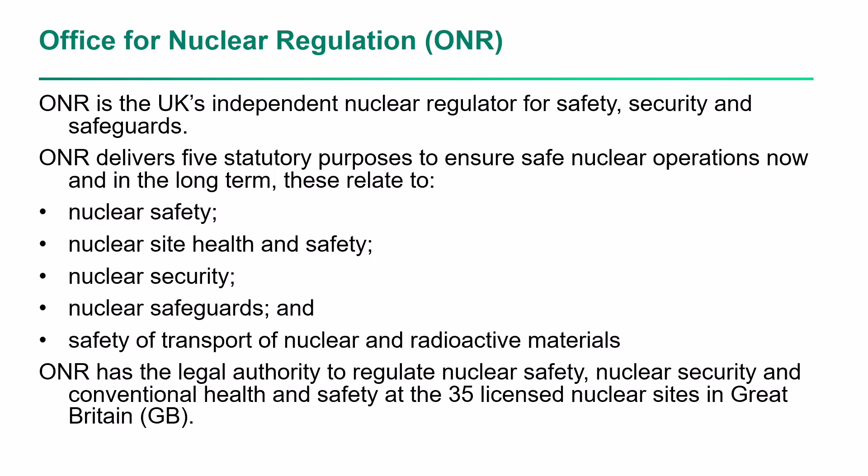Now, this you may not be as aware of: with the introduction of the Energy Act, we are empowered to conduct research. Clause 88 of chapter 3 says this, quite interesting: the ONR may carry out research in connection with the ONR's purposes, or arrange for such research to be carried out on its behalf. When appropriate to do so, the ONR will publish those results or arrange for them to be published. We implement our research via our research strategy, which is available on our website. The work typically gets let via the technical support framework which we have in place. So that's a bit of useful background.

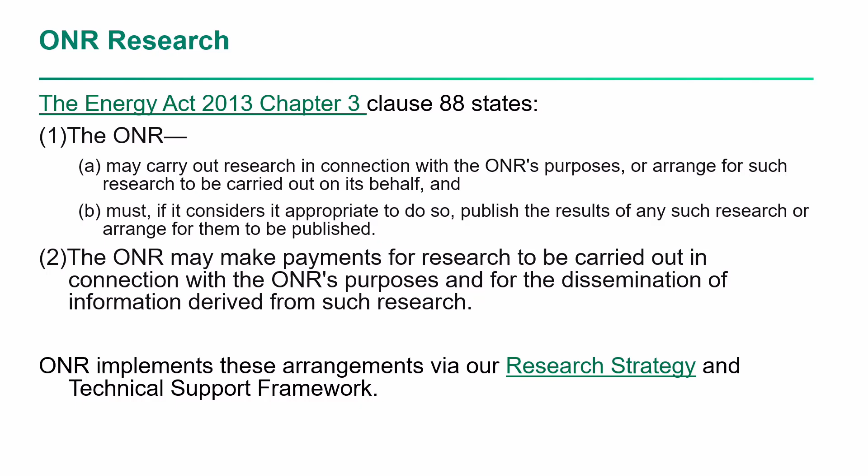I think one of the questions that follows is then: what would drive the regulator to actually commission a piece of research? There are three areas or drivers, laid out here. ONR requires independent advice to assist with our decision making - that could be one. ONR has identified a knowledge gap which requires research, and/or the specialists within ONR require greater understanding and oversight of developing innovations or emerging subjects. It was felt that this research being presented today for aircraft impact touched upon all three of those drivers.

So expanding upon that a bit more, the why, or the rationale behind why, it's important just to go over the current position. So we have our safety assessment principles, and they identify aircraft impact as an external hazard. We've got expectations within the technical assessment guidance, which is TAG 13 in Annex 4 for aircraft impact. And duty holders are expected to consider both accidental and malicious aircraft impact within safety cases.

Now the diagram on the right there attempts to illustrate a typical framework by which a duty holder may consider accidental aircraft impact. And you can see it follows those steps of identifying the hazard, determining a predicted frequency, applying a screening criteria, then ultimately at that point the hazard will be either screened in and a design basis established or screened out.

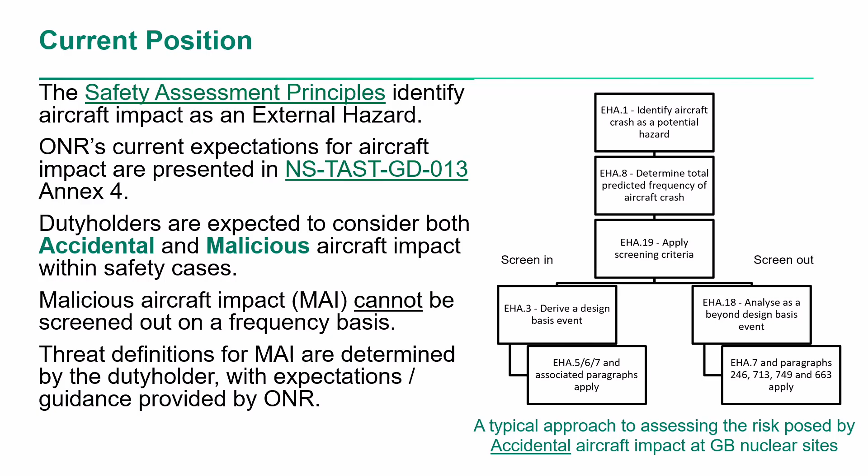But importantly, malicious aircraft impact is different, because with malicious aircraft impact we assume it can occur. Okay. So therefore threat definitions do need to be established by the duty holder, and we work in close collaboration with that. We have expectations as a regulator which we pass on to help get to that position. Okay, so that's where we have been, where we are.

Some other peripheral factors which are significant to why this research was necessary are laid out in the next two slides. Malicious aircraft impact often dictates the design of civil structures for new nuclear facilities. I think we can all agree that it certainly does that, particularly reactor shells and other safety critical buildings or facilities. So it follows, overly conservative threat definitions could result in significant cost consequences due to increased construction costs for new builds or existing facilities, lots of extensive safety reviews. Conversely, underestimation of the threat definition could have safety implications also.

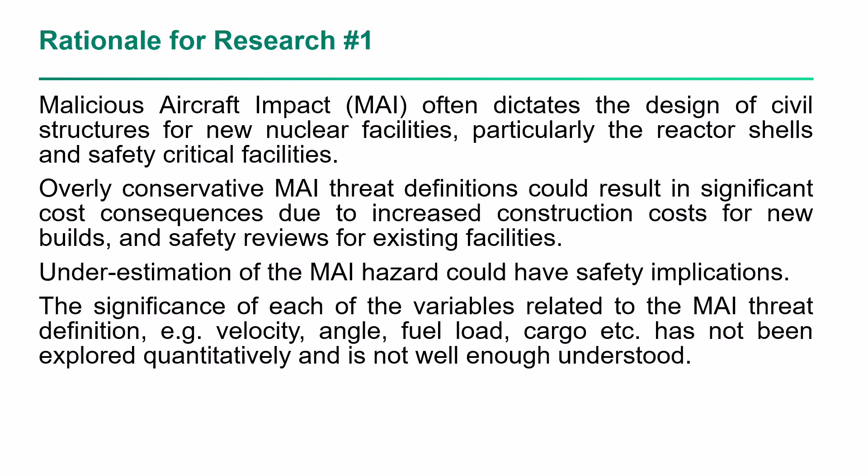Now, the significance of each of the variables related to that threat definition, and there are many, Ming's going to be touching on these, some examples given here: velocity, angle, fuel load, cargo, etc., has not been explored quantitatively, especially combinations of these different parameters. And that was something which on review was becoming clear. So ultimately what mattered was not well enough understood. Unlike seismic, there was little guidance and references on this topic. Compounding the issue, analyses are typically complex, time-consuming and costly.

And perhaps to conclude, one of the significant things was ONR's regulatory expectations for malicious aircraft impact were last developed post 9/11 and have not seen any significant attention since then. And there's been a significant amount of work and development in the area which led to really it being highlighted as a research need.

So what will the research do? Well, the output is going to be used to inform a revalidation of the regulatory position. So this is the expectations that will get communicated to duty holders. So it's going to inform and provide the evidential basis for us to be able to do that. Okay, so that was the rationale for why.

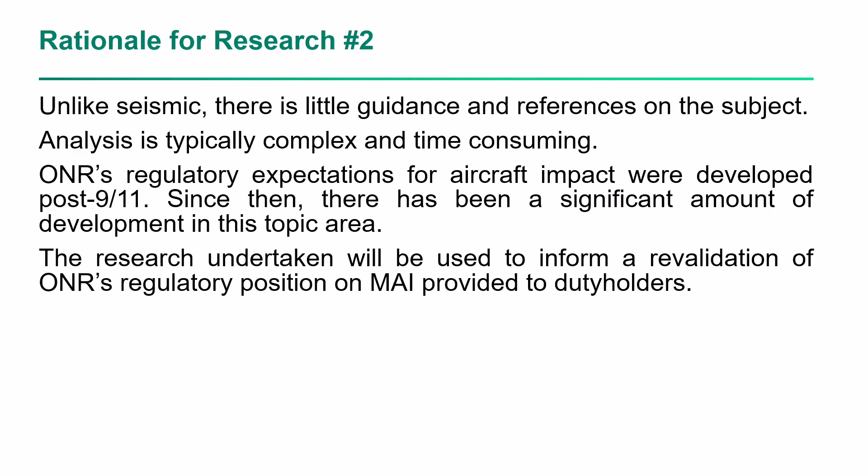So how do we go about commissioning and splitting it up into some logical sequence of activities? Well, we commissioned the research via Mott MacDonald. Now, an important point to note here is that for us as a regulator, what we really wanted to achieve here was not just the view of one particular consultant or one particular branch of individuals. What we really wanted to do was establish what a consensus position was. So although Mott have been leading this work, to add that robustness to the output we had a peer review team established, and Ming will outline the composition of that, but essentially we had representation from Arup and also from specialists from outside of the UK.

The research was split into two phases. Phase one was to provide ONR with an improved understanding of the sensitivity of aircraft impact load time functions to credible variations of the hazard definition and the significance of aircraft impact parameters to the definition of the hazard. It's kind of an exploration stage.

And then phase two was to provide ONR with updated recommendations for representative threats that are relevant to the UK context using statistical analysis and other components as well, bringing that all together. And then the last but very important aspect was to identify the potential consequences for typical nuclear plant and nuclear facility protective structures under these postulated aircraft impact threats.

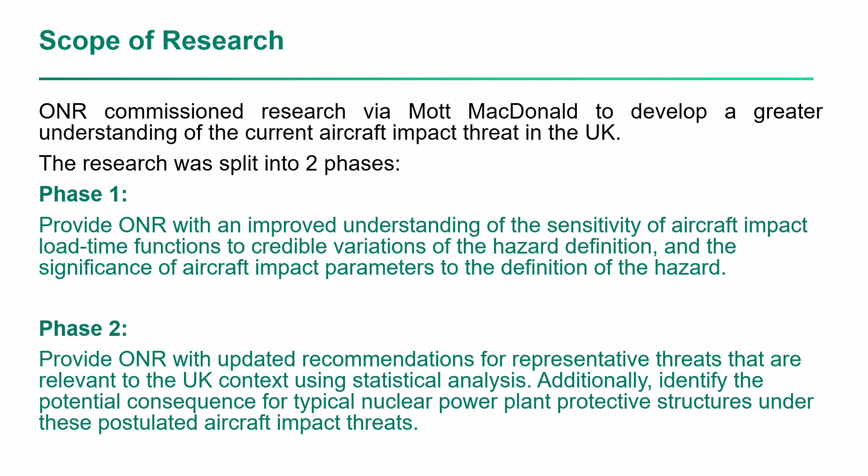Thank you, Richard. Before I proceed with the next 40 minutes of my presentation, I just want to highlight that what I'm presenting today is not my work alone. It's actually a very large team of people that's undertaking this work. There's about 3 years' worth of work done over two phases, as Richard was saying. I'm the project director and framework director for this, providing the directions and the tools and support they need. But the real brains of the piece of work actually come from the team.

We have engineers, we have structural analysts, we have aviation specialists, and also safety case people. So the credit should go to them. I'm merely the conveyor of the information here, providing a summary of the work. And from the project team perspective, we want to say thank you to ONR, because the team have had really good fun in the last 3 years doing some really exciting and interesting research work.

Before I go into the details of the research, I think it's good to provide a summary of the current status quo of aircraft impact assessment, what we're doing these days, and how we got to where we are today. For people who don't know, this is a brief historical context. We started aircraft impact analysis as a load case in nuclear power plants in 1968. Three Mile Island, you've probably heard of that. The main reason was because the power station is located very near the airport.

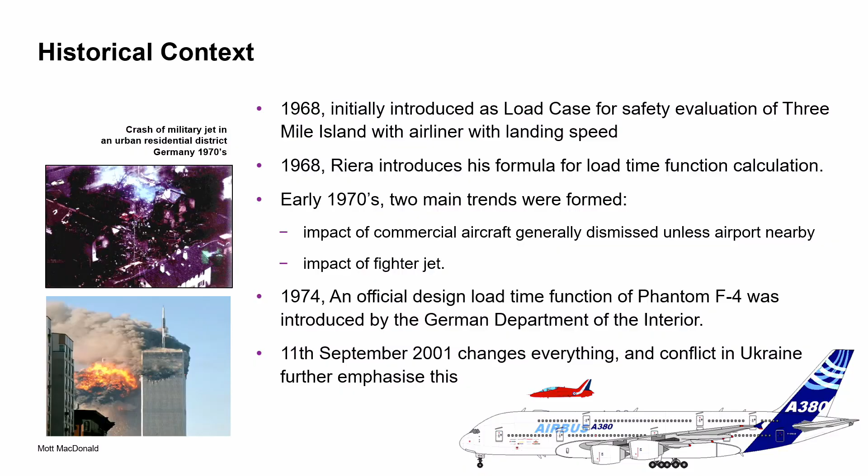Of course, I'm sure we all know September 11 changed everything. We now know the commercial aircraft threat is real and the consequence is very, very significant. And with the conflict in Ukraine and other wars, this has become a real and present issue. However, it's worth highlighting that on September 11 we had the World Trade Center and the Pentagon, but if you put those next to a nuclear power station, especially the containment building and the spent fuel pool, the nuclear facilities are actually very, very small, even though they look like huge buildings.

But by no means is aircraft impact onto those facilities impossible. In fact, before COVID, there was a detailed study done in Switzerland, in which retired pilots were hired in aircraft flight simulators, to work out that it is very possible for this to happen.

And to add to that, you probably realize that there's actually a lot of aircraft in the sky. Of course, it's not to scale, but there's still a lot of them. And there's actually two important things to highlight in here. You've probably seen there's a little hole in Paris. You wonder why. Because this is actually taken on the 26th of July this year. That's the opening ceremony of the Paris Olympics, where you have the no-fly zones. The other big gap as well on the right-hand side is Ukraine and Belarus. I don't need to explain why there's not many flights in there.

So we know it's real. There's lots of flights around. What are the guides? As Richard pointed out earlier, there's not many. These are what I listed here. Those are the majority of the guidance already available, and that's pretty much it. The three most useful ones are the IAEA Safety Reports 86, 87, 88, and they're quite new as well, and there are lots of details in them.

The problem though is, even in all these documents, even within IAEA, the information sometimes is contradictory. So they're telling you different things. What do you do? And the other, probably most important, most used guidance is NEI 07-13, which sets out the performance requirements and is used heavily in the US.

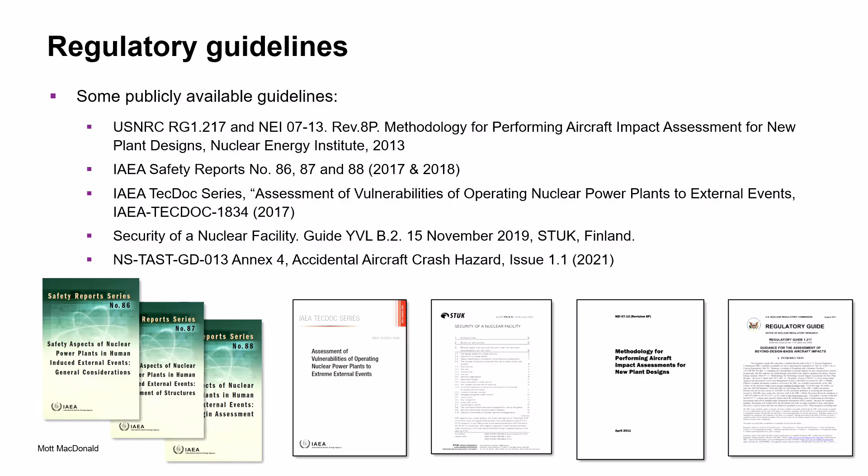And I also want to provide a very high-level summary of a typical workflow, what we do in aircraft impact assessment. You start from the very top left: you define the threats, the hazards, like what Richard was saying. That is the job of the regulator. And then you identify the performance level. This could be based on your safety assessment principles, your radiological release limits, and things like that. Again, that is the job of the regulator to say, this is what we expect you to see.

Some regulators will also tell you what the load time function, the load derivation is. In the UK, we don't. And some regulators even tell you what acceptance criteria you should be working towards. This could be your containment remaining intact, your core cooling remaining, and all this. Others, you have to rely on the duty holder to define what the acceptance criteria are.

Once you have these acceptance criteria, you then move on to determine your protection strategy. What you're trying to do here is define which buildings you need to protect and why. This could be because of your number of safety trains. For example, you could have multiple control rooms, multiple backup diesel generators, so only one will be taken out at a time. So protection, screening, shadowing, and all these different techniques. And then you down-select to 1, 2, maybe up to 3 buildings that must be protected from an aircraft impact perspective. This will always be the reactor building, but it could also be a building that contains your spent fuel pool or your control room.

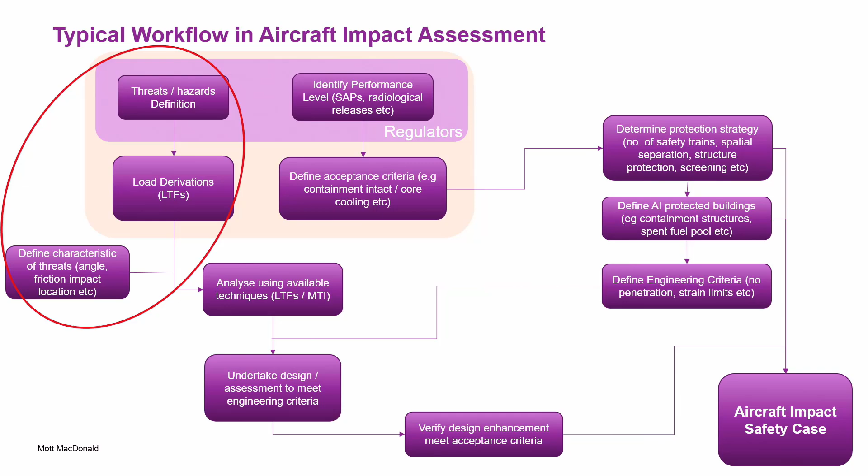But before I go into that, I want to briefly use 2 or 3 slides to explain the various techniques for the load time function approach and the missile target interaction approach. As I said, there are 2 main approaches: load time function and missile target interaction.

Load time function approach itself has 2 ways. You have your classic Riera function, which essentially converts the whole aircraft into a multiple degree of freedom system with crushing zones and things - a very clever and computationally efficient approach.

Or you can do a more detailed finite element load time function approach. Essentially, you build an aircraft model, crush it onto a rigid wall, and take the reactions. You should come up with a very similar answer to the Riera function if you do everything correctly.

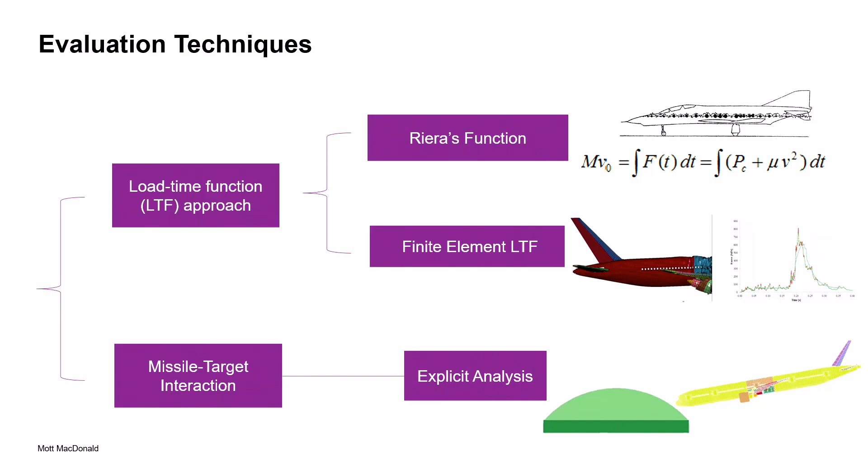And then, of course, you also have the missile target interaction, which usually is explicit, and that would require modeling of the target itself - the size and rigidity of the target will affect the results. Essentially, one is a coupled approach, one is a decoupled approach.

I'm not going to go through the details on the benefits of the Riera function and finite element analysis, but in a broad manner, the Riera function is quick, simple, very good for combat aircraft, but not so good for commercial aircraft.

Especially when you have oblique impact, complex geometry, or a target much smaller than your aircraft - if you just use the Riera function, you're applying the whole aircraft onto that single point. Whereas if your target is so small, you can't have the whole aircraft hitting it.

The finite element analysis approach resolves those issues, but the disadvantage is you need to build the aircraft model, requiring verification, validation, and a lot of work beforehand. Of course, once you build the model, you can use it again and again.

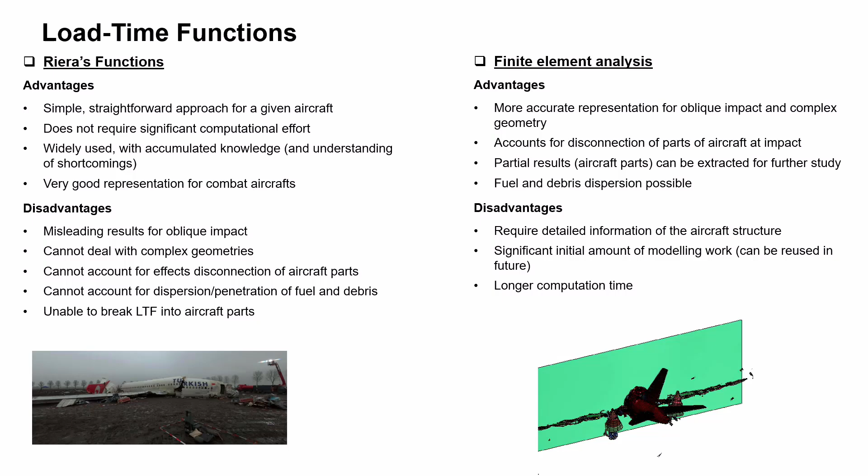And then in the aircraft impact analysis technique, again I'm not going to go into detail, but there are 2 major parts: missile target interaction and load time function analysis.

If I start with the load time function analysis, that is basically the mainstream approach right now. You build your aircraft model or use a Riera function, generate a load time function, and apply it to the structure as a pattern onto the structure.

It's easier and better computationally, but complex geometry will be a problem, or you can't account for the disconnection or erosion of the aircraft, and fuel and debris, for example, is going to be difficult to capture.

For missile target interaction, you have the benefit of capturing all those, but a significant disadvantage is the modeling effort, and it usually takes a long time to run. It's okay to stick with the load time function decoupled approach if you have a very large, rigid structure, but that's not always the case.

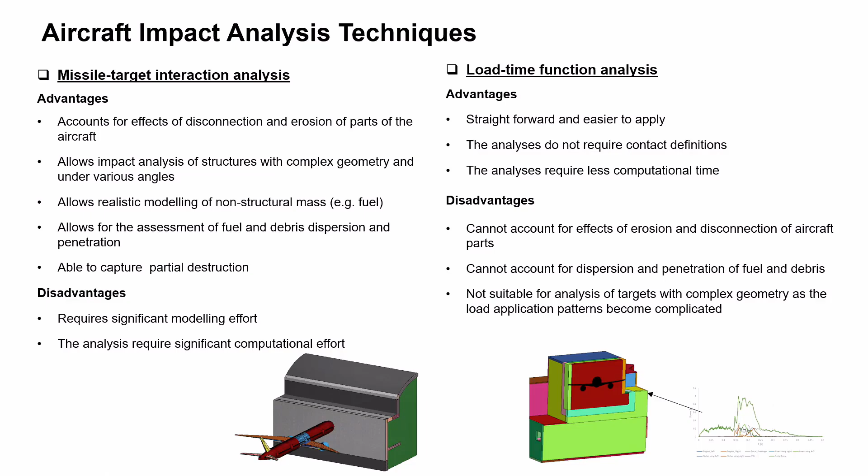There will be cases where your target itself is small and is moving. This is an example - essentially a spent fuel cask put on the ground, with spent fuel inside. If your target itself is moving, you have no other choice but to use missile target interaction, because how else could you do it? So this becomes the only reasonable option.

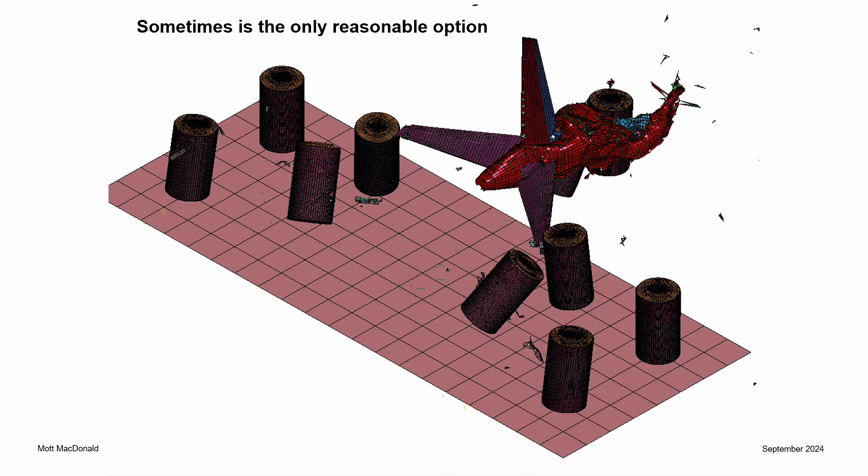So that is a very, very brief summary of the various different techniques you can use. Now going into the detail of the research work that we are doing.

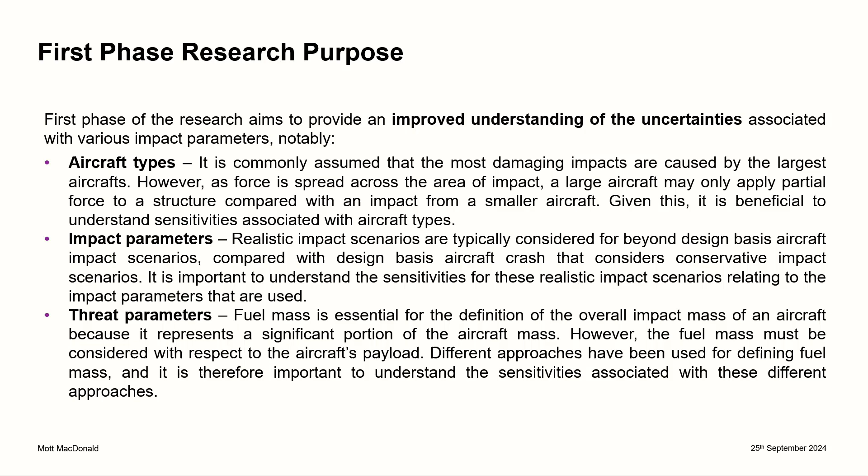And the other thing is the impact parameters - in this case your impact velocity, impact angles, and things like that. And then your threat parameters, which relate to the threat itself, such as payloads. I'll go through them in detail later, but the overall approach is actually quite simple.

Essentially what we do, we define what aircraft we need to look at. We define the parameters we need to bring forward for sensitivity analysis. We then set out a baseline and construct the aircraft model. You undertake a series of finite element analysis, crushing them into a rigid wall.

You generate a series of load time functions and compare them. So the approach is very well known in terms of sensitivity study, it's just a lot of them. And then 6 aircraft were selected, and I'll go through one by one the reasons behind it.

The first one is the Boeing 737. In this case, Boeing 737 together with A320, they are probably the most used aircraft in the UK for sure, and probably in the world. And your B767, which is unfortunately the aircraft used in the September 11 event, and the Boeing 777, which is the largest twin-engine long-range aircraft.

And then you have Airbus A380, which is of course the largest commercially available aircraft, in this case with 4 engines. And you have the Gulfstream G650, which is a very large business jet, in this case quite small.

You're thinking, why? The reason for a business jet is it sits between a combat aircraft and a passenger aircraft, yet a business jet usually flies at much higher velocity. And then, of course, you have the cargo version, a freight version, in this case we use a B767, but that could be anything.

I mentioned earlier in the guidance, even various guidance provide you a different categorization of aircraft. So even within IAEA documents, in this case SR 87 and TECDOC 1834, they have a slightly different grouping system.

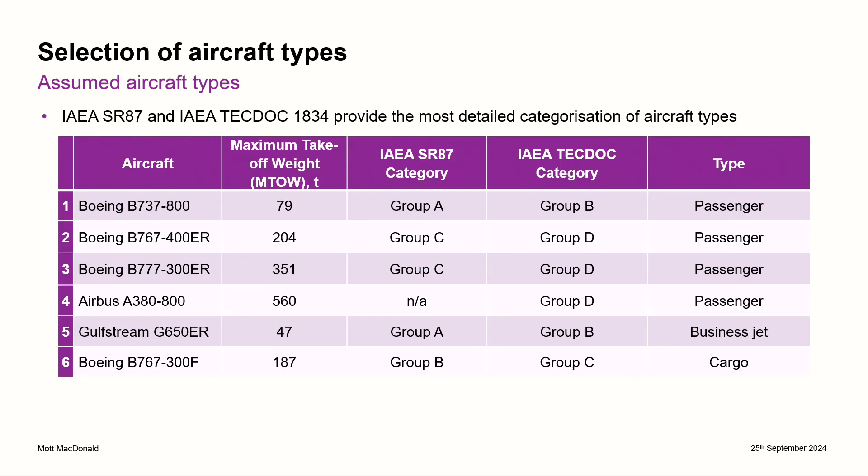We also only model what is needed to be modeled. So in this case, if you look at the picture in the top left corner, the wings are a lot smaller than you'd expect to see, because the non-stiff, flexible part we don't model, since there's no impact to it. The nose we don't model because it would just crumble. And on the top right picture, all the seats and things we just smear over the cross-section of the aircraft because it's not important for what we're trying to do.

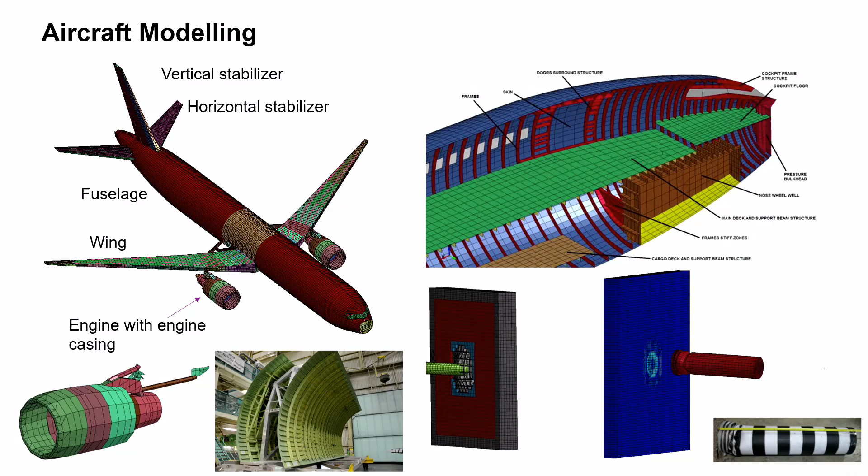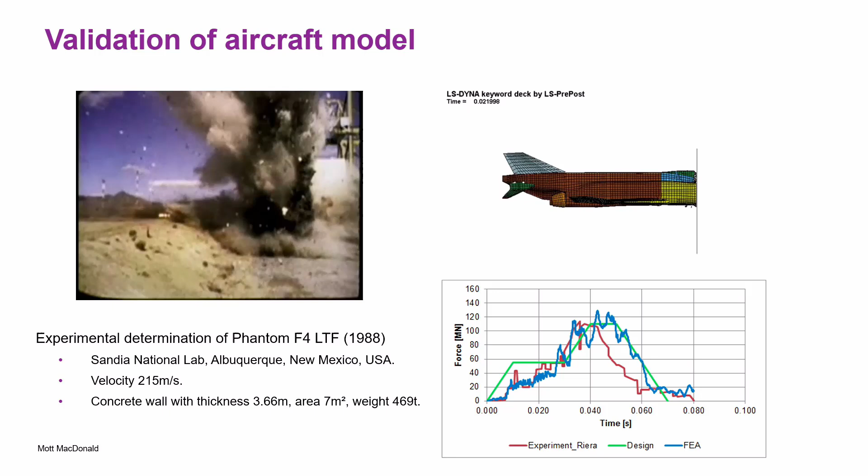However, the engines we model very carefully because that is the important part, the hard missiles. Also, you probably can't see the landing gear, also an important part which we model in a lot of detail. And then, of course, if you can, you always do some testing. Some people will have seen it already. If you can do some testing, that's absolutely great, but I don't think anyone can do that for every single aircraft.

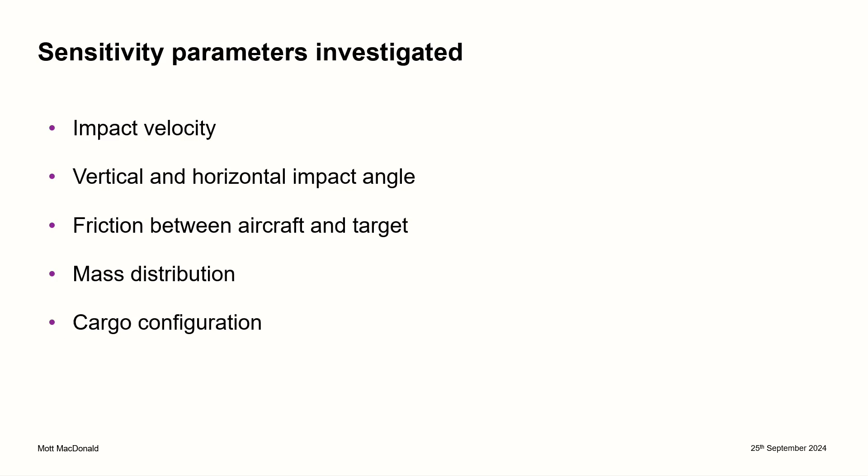So what other parameters do we then look at? Impact velocity, we know that's an important thing, so we need to look at the impact angles, both from the horizontal and vertical perspective, the frictions, especially when the aircraft hits a rigid wall at an angle, the friction between the aircraft and the rigid wall is very important, and the mass distribution, I'll explain a bit later, and what kind of cargo they're carrying.

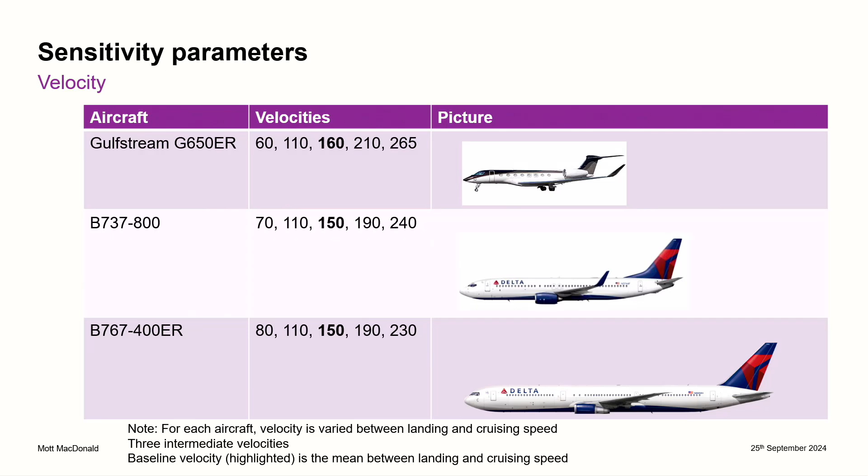So of all these aircraft, we then work out 5 velocities per aircraft type. The starting velocity will be your landing velocity, landing speed, and then you have the top one, which is your cruising speed. You then have 3 in the middle, so that gives you 5 data points per aircraft. That will be good enough from our perspective to work out the trends and things. So we go through each of these aircraft, 3 of them, 5 velocities.

We also look at horizontal impact angle. We pick 4: 15, 30, 45, 60 degrees horizontally, and vertically also 15, 30, 45, 60. But actually the vertical impact angle is not realistic, because ultimately any pilot or aircraft enthusiast will tell you that anything above 15 degrees, the aircraft will have lost control. But we want a range, so in our case we're actually covering what could potentially happen. The aircraft could intentionally have a very high vertical angle, so we need to make sure we cover that.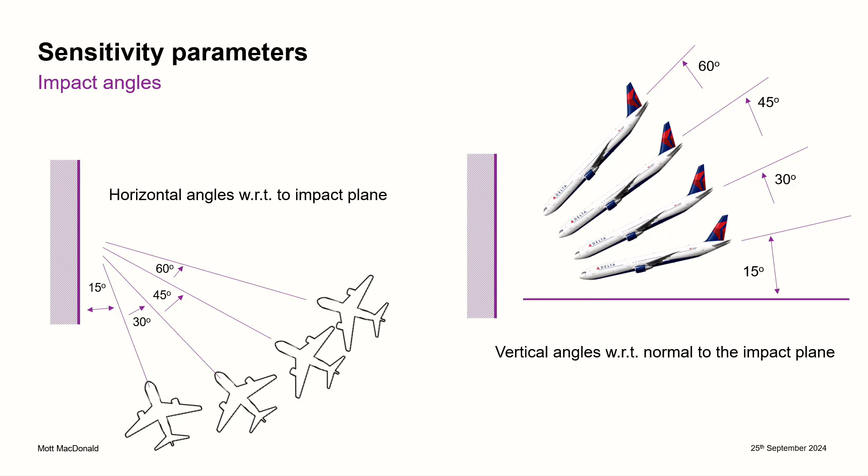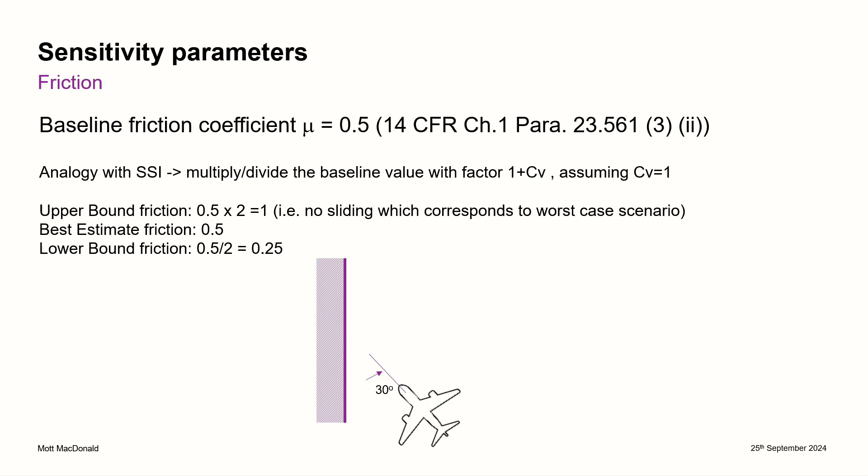And frictions, typically 0.5 is used, but we want to see what's different if the frictions are different. For those who are involved in negotiation or discussion with the ONR, you'd know we sometimes argue about one single number for a very long time. Why is it 0.5? Why is it 0.4? This is the idea, trying to understand the impact and what we should be focusing on. We also look at the payload.

The way we define the weight of the aircraft is usually called MTOW, maximum takeoff weight. You'd be surprised, but you can't have maximum payload and maximum fuel at the same time. If you had both, the aircraft would be above its maximum takeoff weight and couldn't take off. So it's always a ratio balance between payload and fuel. We look at a maximum payload case with whatever fuel remains, and a maximum fuel case with whatever payload remains.

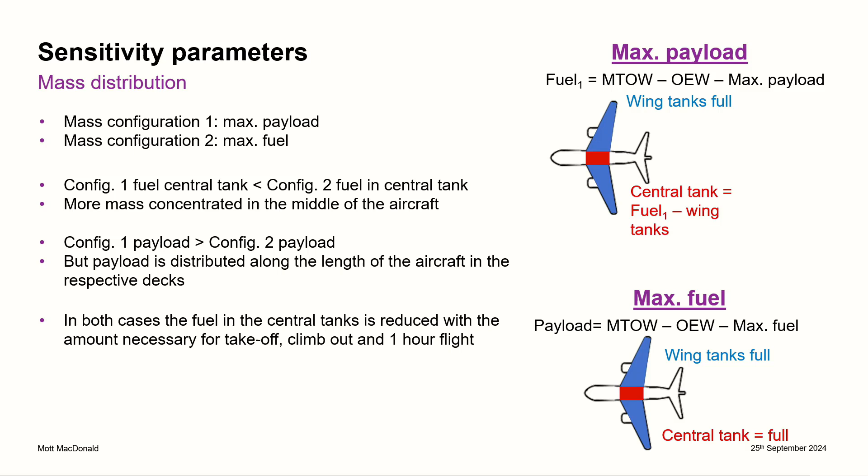We also look at cargo configuration, because the hard missiles that impact the structure are important. So we need to know if the aircraft isn't carrying passengers, but big, heavy cargo instead. We look at two extremes: one is a maintenance aircraft carrying engines, with two big engines inside - you can't have more because it would exceed the payload requirement. The other carries drill bits for oil rigs, which is small, sharp cargo.

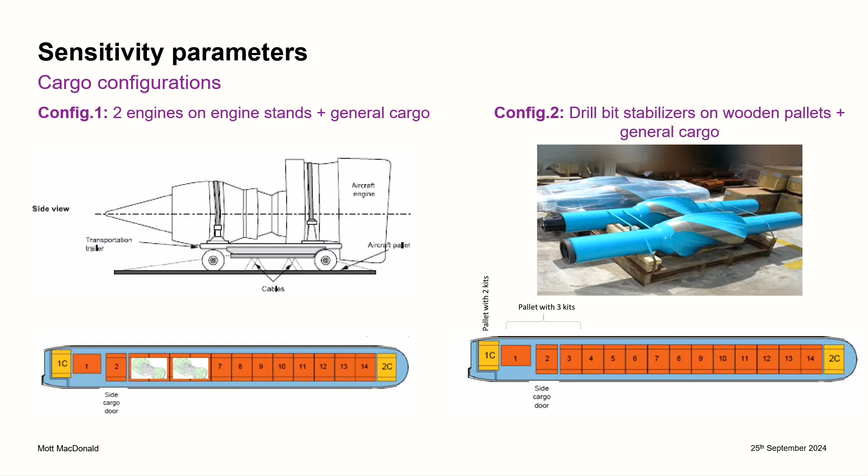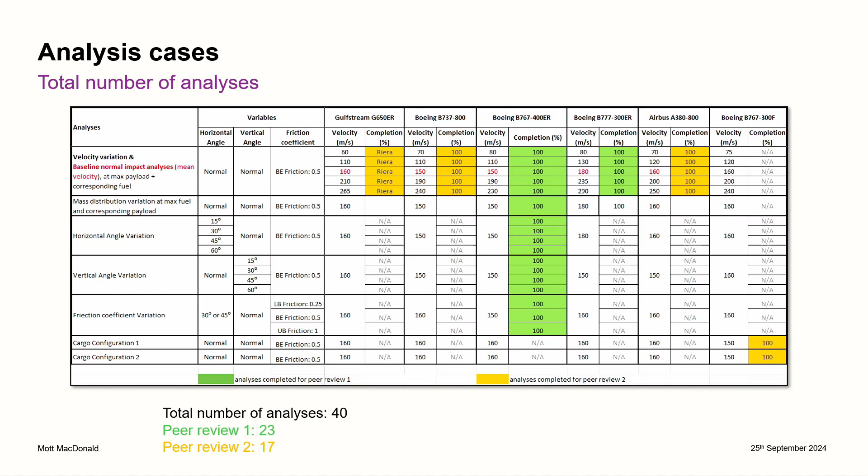After that we run a series of analyses - in this case, 40 of them - each taking a couple of days to run. Then we compare the results. As Richard was saying, we can't show you the detail of the results, but we can show you the key findings.

The number one key finding - you'd intuitively expect that to create maximum peak impact forces, you'd have a normal impact directly to the wall. That's not always true, and we were a bit surprised to find that out. Studying the results in more detail, we realized why: the hard missiles in the aircraft are the landing gear and the engines. With a direct normal impact, the landing gear hits the wall first, and its effect has passed before the engine hits. Whereas with a slight horizontal impact, at one point both the engines and the landing gear hit the wall at the same time, creating maximum forces.

This was actually independently verified by one of our peer reviewers in Germany, as Richard mentioned. They identified identical results in this case, though they were using Airbuses - the results were very similar. But one thing we also realized is that it's aircraft dependent. Not every aircraft is the same, because the configuration is slightly different.

But actually it's not too bad, because once you angle it slightly, the area is bigger, so the pressure is actually less. So if you angle it slightly, in terms of pressure it's actually very similar to a normal impact. But it's still something we should consider.

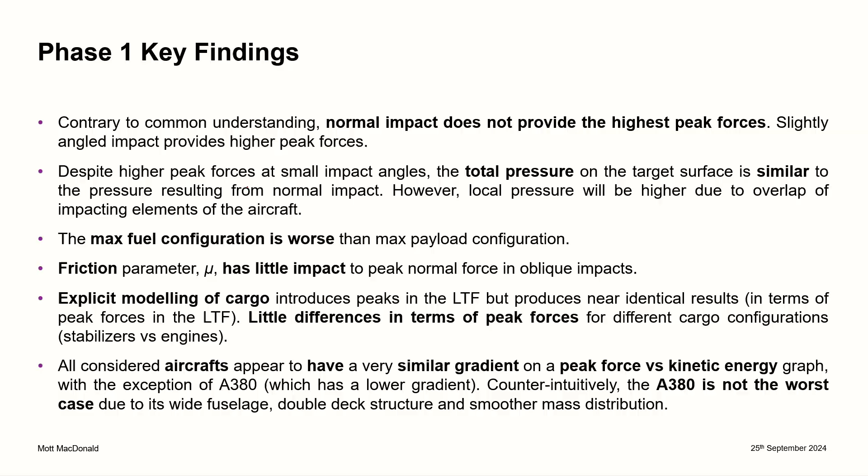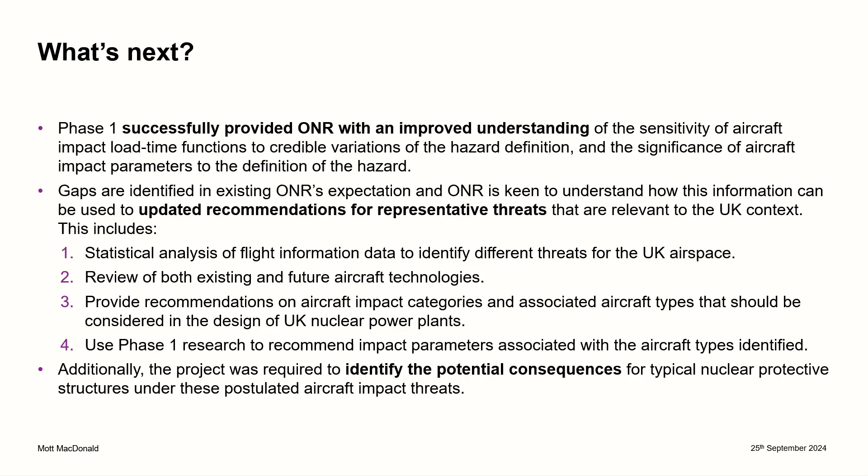So these are all useful, important findings. But what does that mean? We move on to phase 2 of the work. In phase 1 we improved our understanding already. So how do we use this information to improve our understanding further? We decided we want to look at statistical analysis, to see what's actually flying in UK airspace, which can then help our recommendation to the ONR for them to decide what they want to do next. So we start by looking at the Civil Aviation Authority information.

The Civil Aviation Authority provides takeoff and landing data for over 60 airports, so we have 1.7 million aircraft within a 1 year period. You're asking why 1 year? We all remember there was COVID, unfortunately. From April 2022, that's when we found the data becomes stable. So we have a 1 year period of stable data. We also don't want too long a data period because we want the data to be more current. We only look at commercial aircraft, ignoring private jets, official and military aircraft in this case.

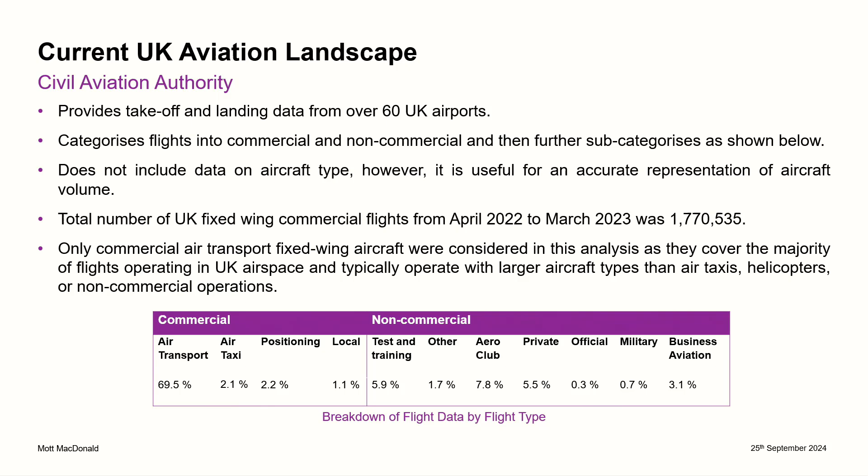Those are only flights taking off and landing in the UK. We also want flights flying over the UK, so we need another set of data, in this case the Sabre database. This one has all the scheduled flights of 900 airlines worldwide, but it only contains scheduled flights, not unplanned flights or ad hoc movements. So the numbers are always slightly less than the CAA information, but it's very consistent.

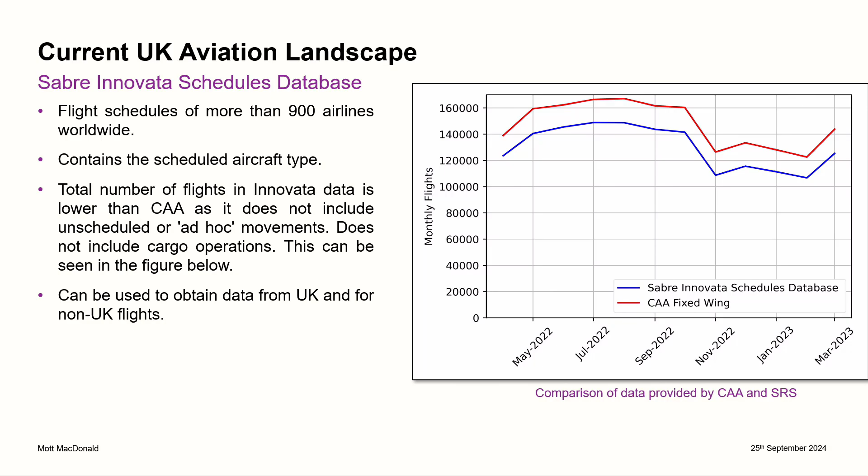Overflights are quite important in this case because the UK is very unique, in the sense that it sits between mainland Europe and America. So there are a lot of large flights that fly from Europe to America, and they actually fly over UK airspace, so we need to include that. How do we do that? We work out, using simple great circle routes, the flights of major airports in the Middle East and Europe to the Americas, and work out the flight path in this case.

But we then remove those that aren't relevant. So for example, Spain and Portugal are removed because they're never going to fly over the UK. Same with the Scandinavian countries and similar ones. So it's very much the Central Europe routes. And then with Middle East Airlines and Indian Airlines, for example, because of the great circle route, they would actually fly over the North Pole. We haven't taken into account the war in Ukraine at the time, but it's a good enough representation, we think.

So that actually gives over 200,000 flights of big aircraft in there. Combining this, and to provide even more detail, we then weight-adjusted the aircraft depending on where they are. They could be full fuel at the beginning when they fly to America, and when they got to UK airspace, we worked out how much fuel percentage would have been used, and things like that. And then we put it into breakdowns of 50 tons.

From the picture you can see, on a 1 year basis, there are over 1.1 million aircraft that are between 50 tons and 100 tons. That is very much your A320 and your B737. And then there's another big peak in the 200 to 250 ton range. That's your B787, your A350, flights of that size.

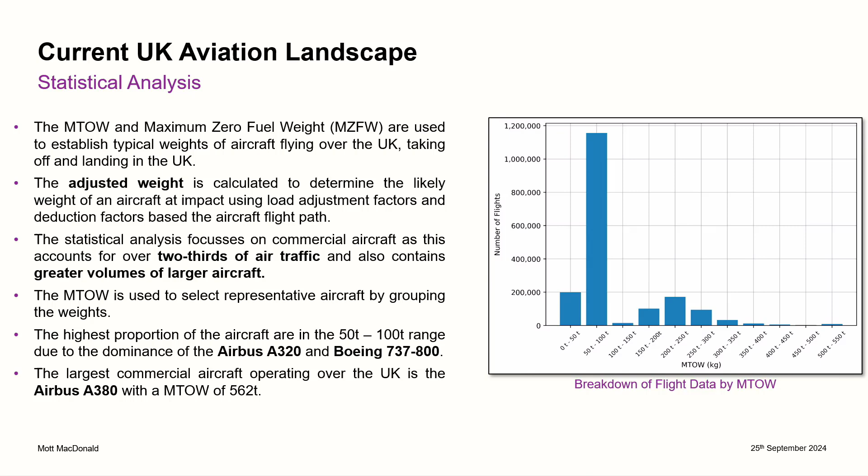So what is that? If you put it into a distribution curve, that allows us to work out the mean. So the mean in this case, from the maximum takeoff weight, as I said before, is the 737 and A320. Mean plus one standard deviation will be roughly around 220 tons, and the nearest aircraft in this case is the B787-8. And then mean plus two standard deviations is actually just under 350 tons, and that's your B777.

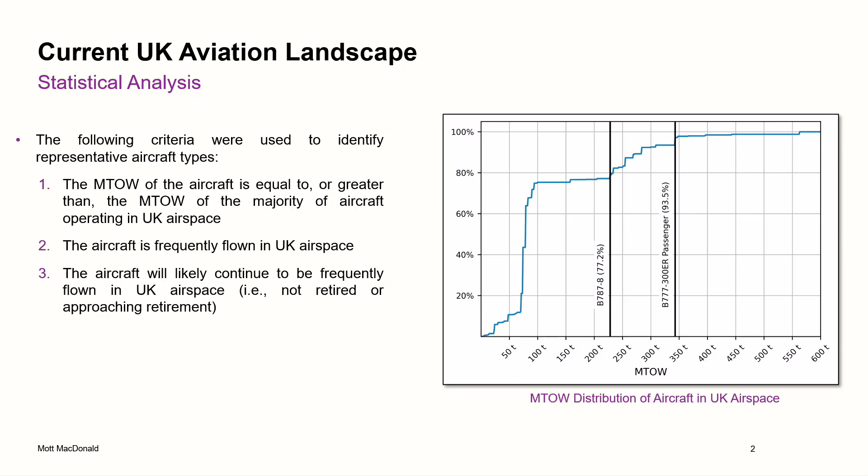So this information is very useful in this case. It's statistical, but very useful to help the ONR make the decision on that. So those are the two main aircraft that we say, Mr. ONR, you need to look into this. Because the B787 covers about 77% of the commercial aircraft in UK airspace, and the B777 covers 93.5%. This is much larger than other countries in that sense, because of the location of the UK airspace.

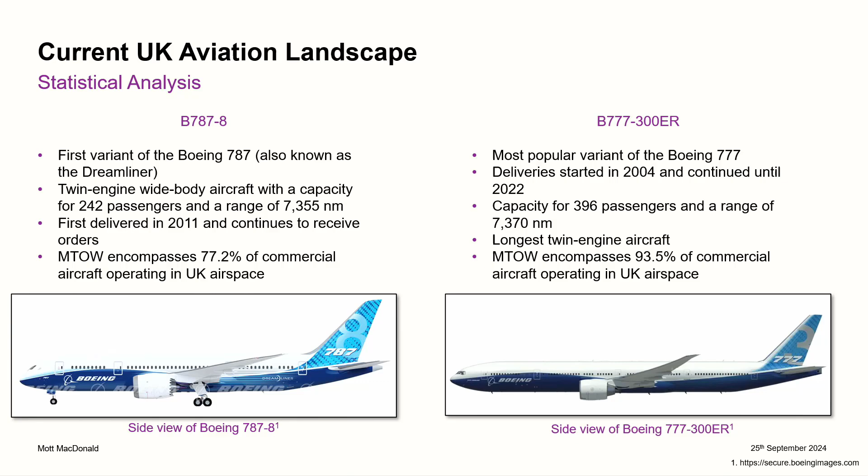We then need to look at one thing we found. If you look at this, both these aircraft are twin engine, so there's no four-engine aircraft here. Are we missing something? So we want to look at the trends. What are the typical four-engine aircraft? They are the A380, the A340s, and the B747. Looking at the last 10 years, the number of four-engine aircraft actually reduced quite significantly.

The main simple reason being four-engine aircraft is a lot less fuel efficient compared to a two-engine aircraft. So the trend moving forward is very much towards wide-body twin engine aircraft, which is exactly what we found, and we're happy with that.

Also, we found that the trend is very much moving from classical aluminium into composite material. But actually it doesn't matter from our perspective. Composite material, all we're interested in is the mass impact onto the structure.

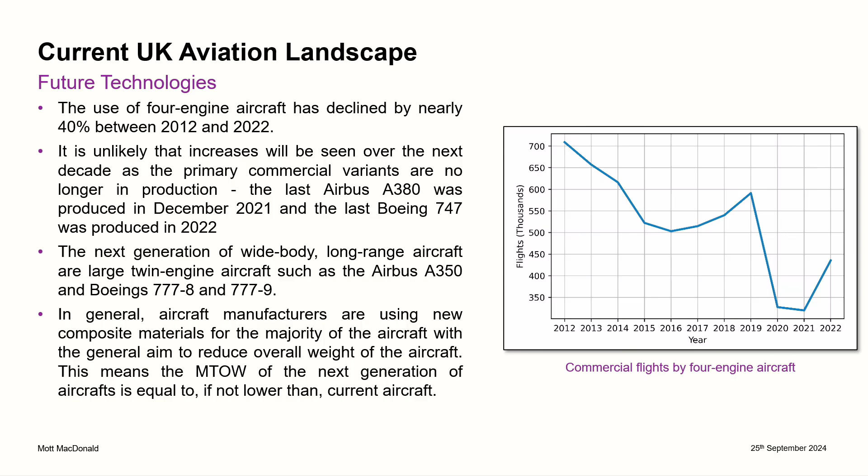We also looked at what are the future trends in aviation right now. Sustainable aviation fuel is definitely one thing being talked about a lot. Happy about it, but really from our perspective it doesn't change anything.

Also, flying taxis are very popular. Boeing is developing something, XPeng in China is doing something else, Singapore is doing something else. But again, they're small and don't impact us directly.

Hydrogen-powered aircraft is being pushed for as well, but the earliest won't appear until 2035, and that's a very optimistic guess really. So we are quite confident that nothing will change, based on the study we've done, in the next 10 years or so.

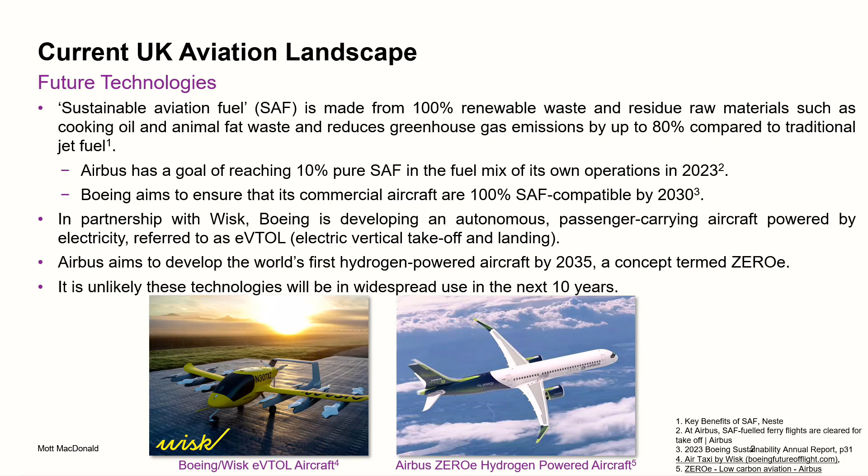So what does that mean then? Now we've done phase one work, we know statistically what it is. So we provide all this information to the ONR, and we want to understand, based on current and future trends, what we want to do with it. As Richard was saying, a lot of information is sensitive, but the duty holder, if they want to, can have the proper path to get that information.

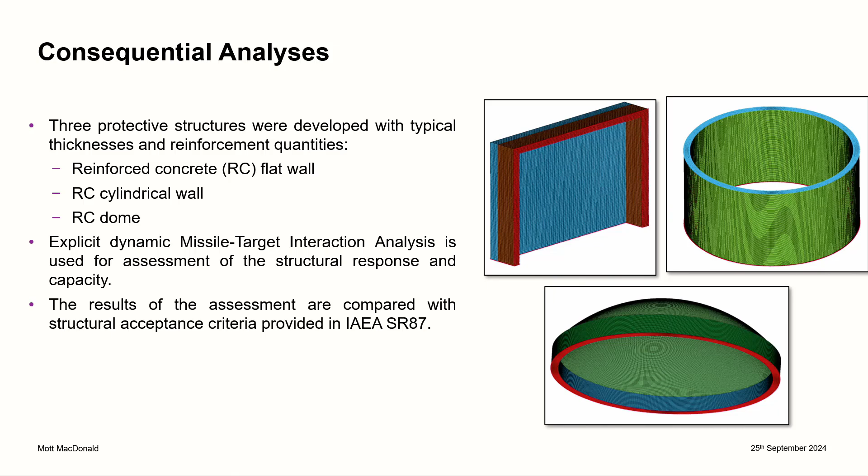So what we then do is use the new threats and the existing threats, and do some consequential analysis. We pick three typical structures: big reinforced concrete flat walls, cylindrical walls, and a dome structure. These are very typical reactor-type constructions. We then do some missile-target interaction studies on those and compare the results from the rotation perspective, from the strains and reinforcement perspective, and various different things.

So I spent almost 40 minutes talking about various different tests. So where are we now then? How certain are we about the aircraft impact hazards?

I would say we're better than before. What we've learned is we definitely have a better understanding of what is important, what is the big ticket item we should be looking at in terms of impact and threat parameters. We also have a much better idea of what is actually flying in our UK airspace, and we think the information is valid for a while. We're definitely more confident, and therefore, from an assessment perspective, from the ONR perspective, we're happy.

However, as we say, we're all humans, and gazing into the crystal ball is very hard, and human factors cannot be predicted. But what's next? The future work is still being discussed, what will happen next.

But what we think is likely to happen is, borrowing from the seismic world, so far everything, the load time functions that we generated are deterministic. Because of all the data we now have, it is possible for us to move into the probabilistic space, just like seismic PSHA, for example. So we could potentially generate load time functions based on an 84% high confidence, low probability level. This is the area we want to move into, and this is an area that so far in the aircraft impact field hasn't been explored, simply because it didn't have this set of data, and we think we're getting there.

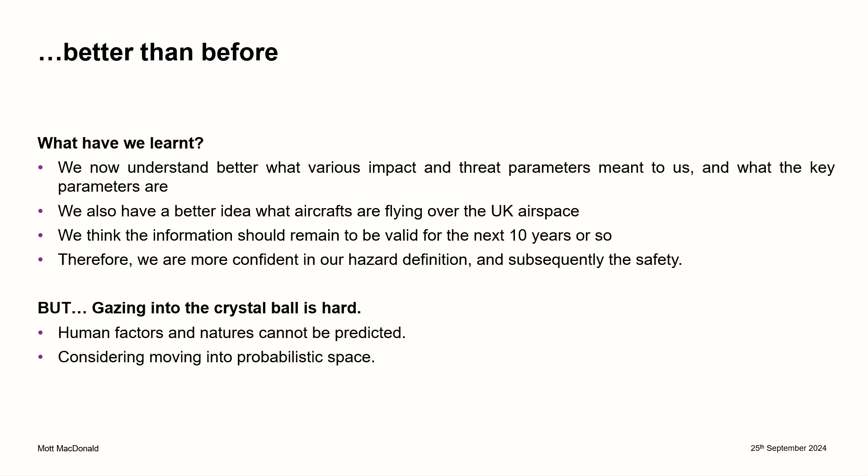As Richard was saying earlier, we have peer reviewers from Arup. One of them is actually sitting there. And also we have Wölfel from Germany. They are one of the very consultants that do a lot of work in this area in Europe. Thank you for the work. I think that's it from here, actually. Thank you.